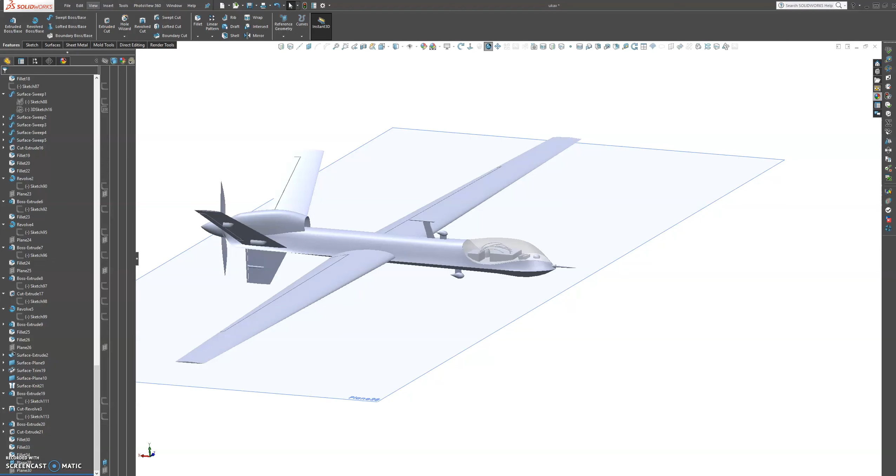I think we have to do one by one. So let's go back to SolidWorks, and then we're going to use this plane. It's right underneath the body which we need, so we're going to draw on this plane.

Let's flip over so we can see things. So the first sketch that we're going to do is going to be a spline. Okay, and then first we're going to create the one that we're going to project onto the body itself.

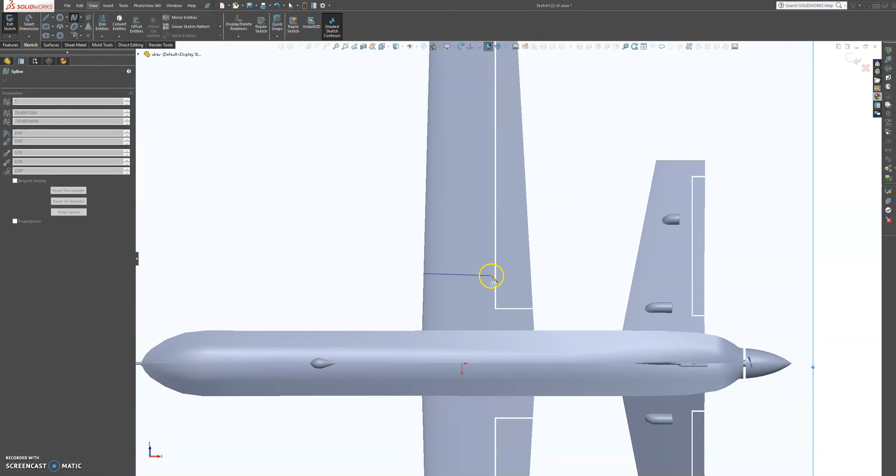So the first one will be somewhere about here, and exit this one, and let's come in here and manipulate the sketch, just somewhere out here, like that.

Also, we don't want to make it too thick, so let's create quickly a center line so we can mirror this entity over, and create our mirror. Let's make sure that our points are connecting to each other, so our mirror will be good, and our shaded sketch. So let's create a mirror, and mirror this entity over this line.

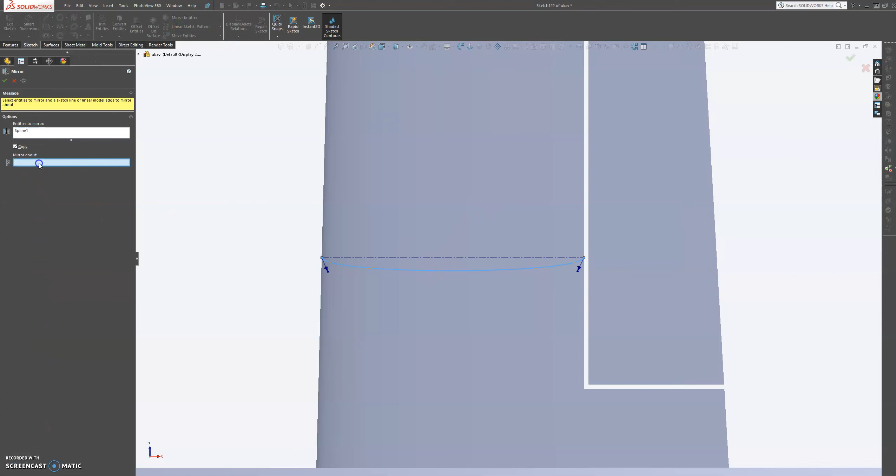Now if we move one entity, then the other one will move with it, so we can see exactly what we're looking for and what we want. So let's not make this too thick, something like that, and back here as well.

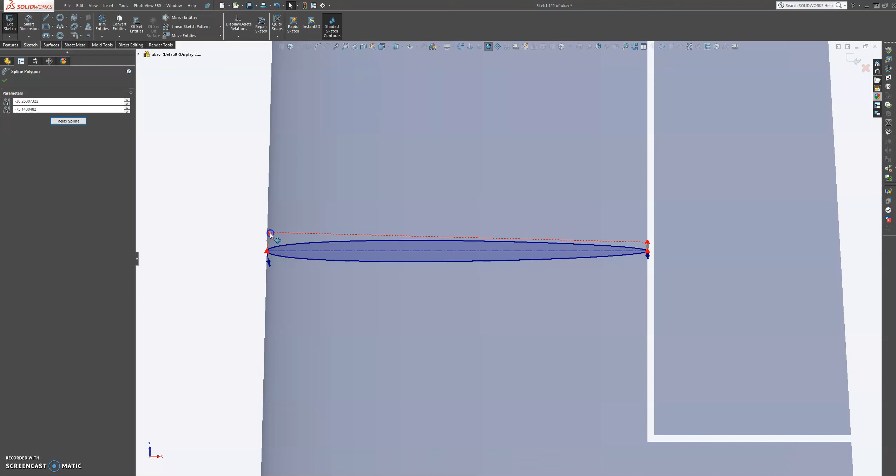Okay, for the top portion it's going to be perfect, a little bit thinner, like that. Okay. And then we're going to press escape.

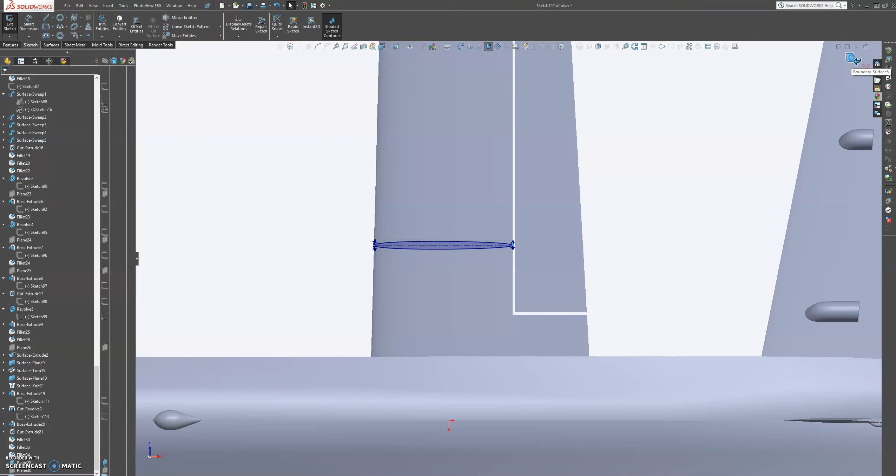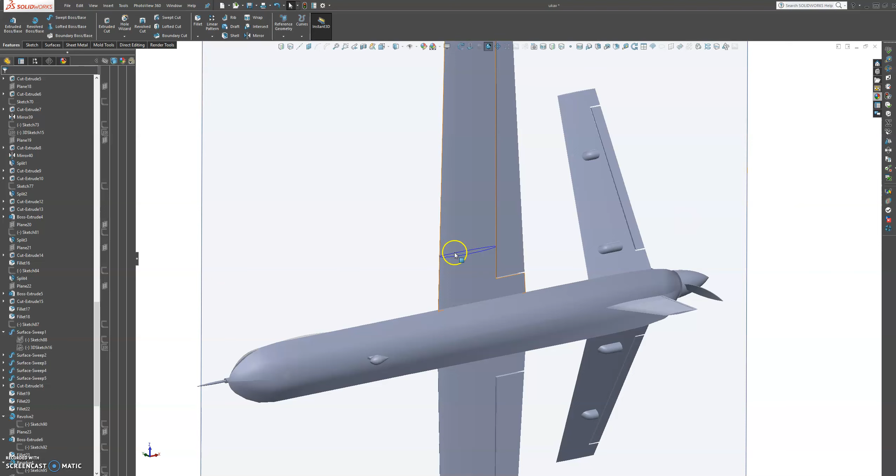Okay, and we're going to project this line, project this curve onto the plane. So let's select the sketch, and then with the face, and that's very good. Okay, that's good. And then now we have to make another sketch on this plane here.

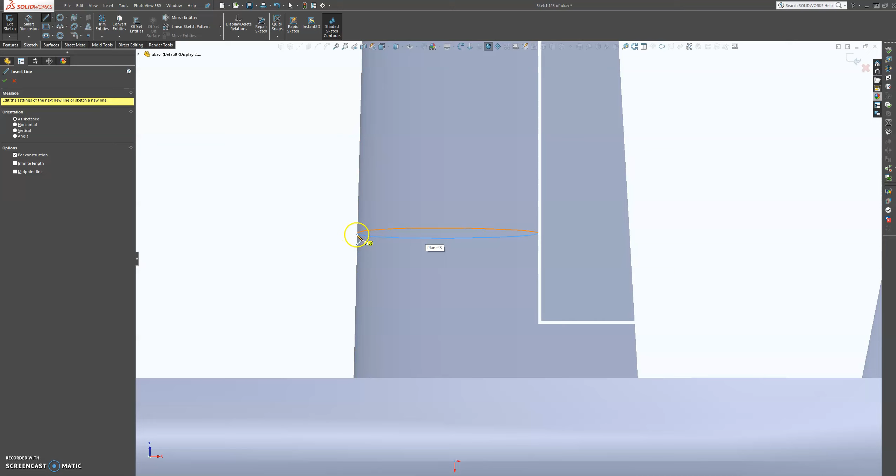Let's flip it over, and then for the bottom portion let's create a center line based off of this center line here, if you can grab that point. Okay, so that's good. And then now we're gonna grab our spline, and it's going to stick out about that much, and we're going to trim it back.

No, it's already going to be trimmed back because it's going to be a lofted surface. So let's create our spline from here all the way up to about here, so we can put the rockets on there.

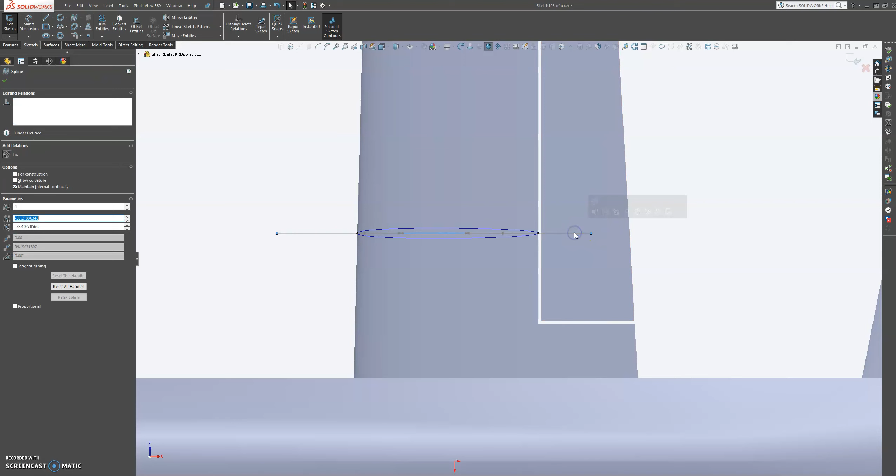Okay, exit that, and let's grab that spline and pull it out to our liking. It's not gonna be much thicker than the one that is already projected to the body, so we want to watch out for that.

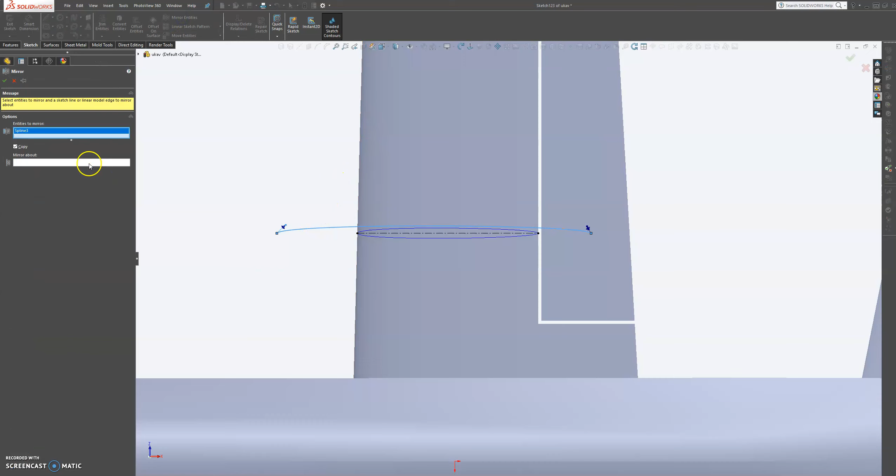Okay, so let's create a center line here again. Actually, we can use that center line to mirror it over, so let's mirror this over this. Okay, so now if we grab this, we can further make adjustments to it.

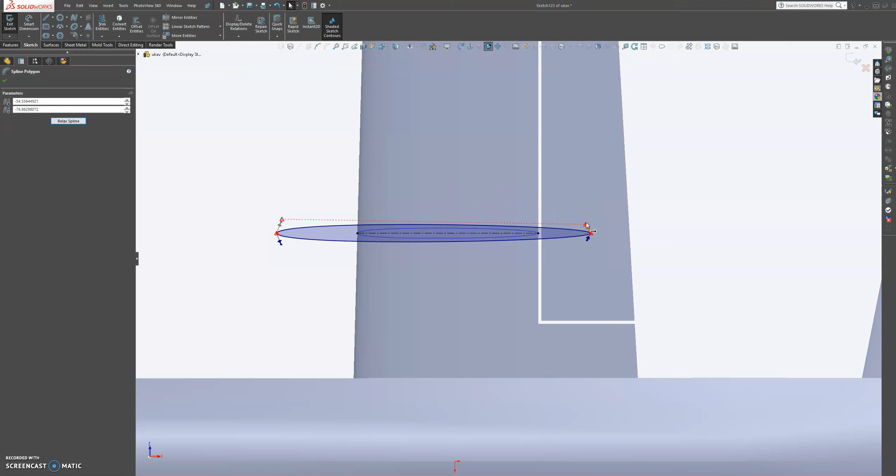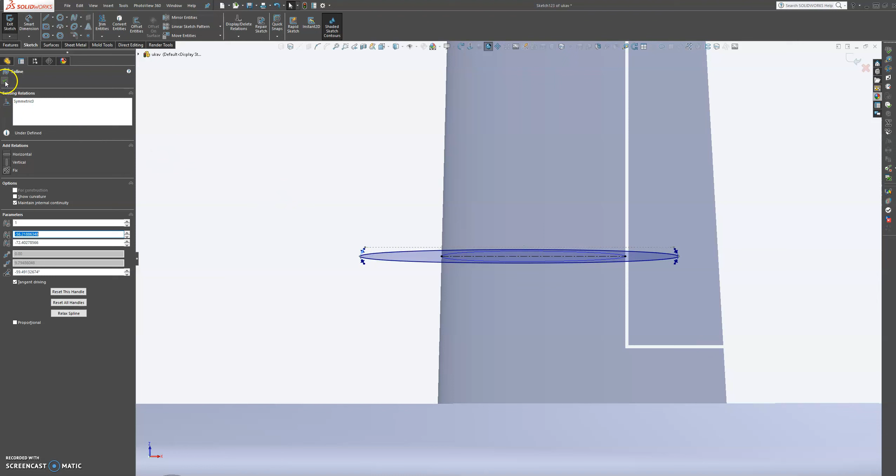Yeah, so let's try to grab our control bars here, just make it a little bit thicker in the ends, pull it in a little bit more. I don't want to make it too thick. Something about there, so I'm going to press OK on that.

Okay, so once we have these two defined, it's gonna come out something like that. To me, I think it's gonna come out a bit too far. So let's have a look. It doesn't come out that far.

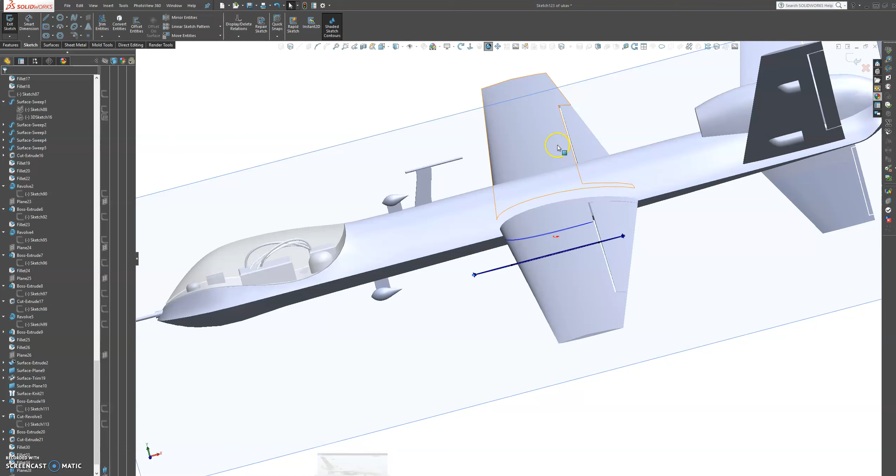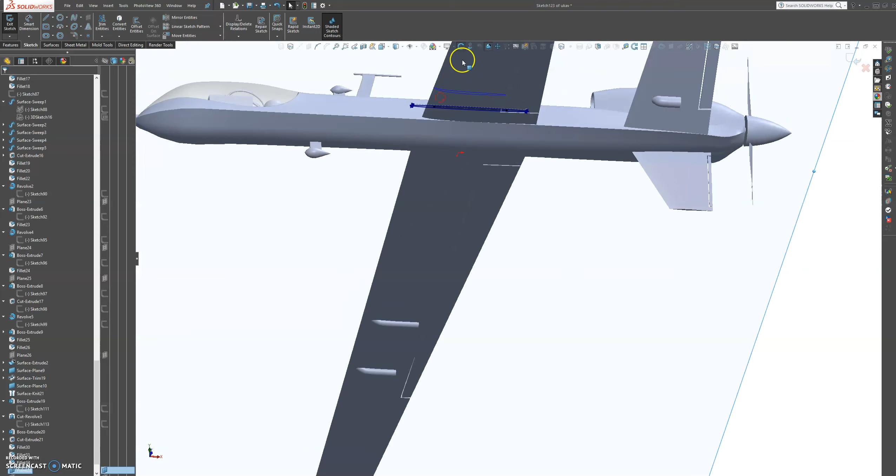So let's head back to the sketch and make some adjustments to it. Let's grab that point here, just pull it back about that much, and that's gonna be perfect. So let's have a look, and it's gonna come out like that to that point. Let's have a look at the sketch again.

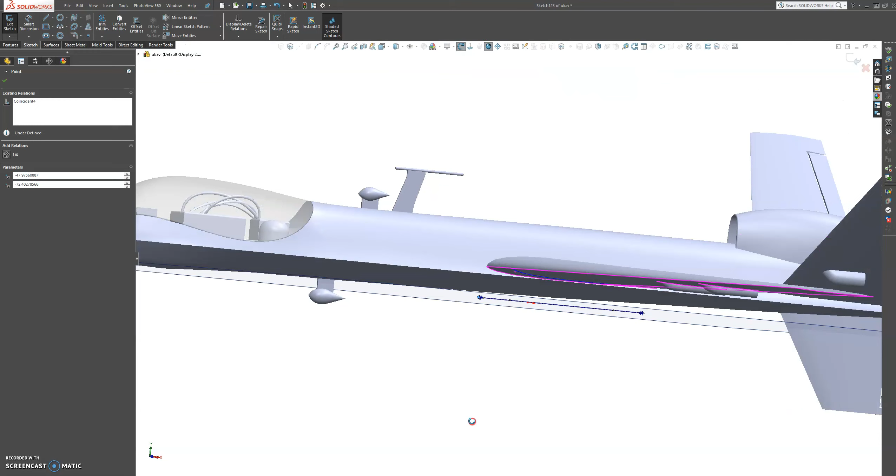Let's have a look. I touched something here that we shouldn't have. So let's come back with our spline. It comes out like about that much, but that way. Okay, that's good.

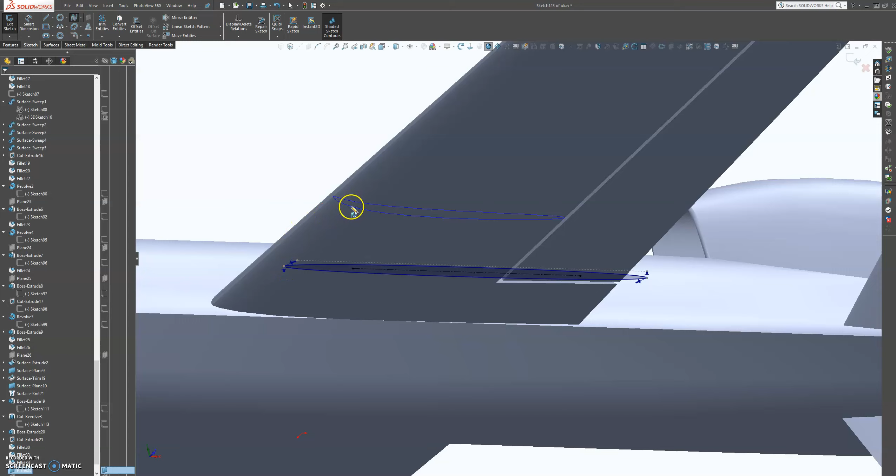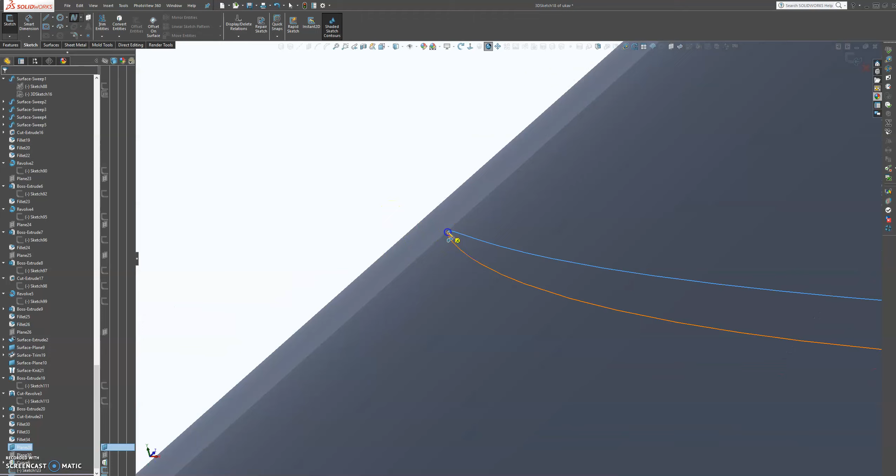Okay, let's exit this sketch and now go to 3D sketch, and let's see if this time we'll be able to snap onto it. Yes, we do. So let's snap onto this corner here and then this here.

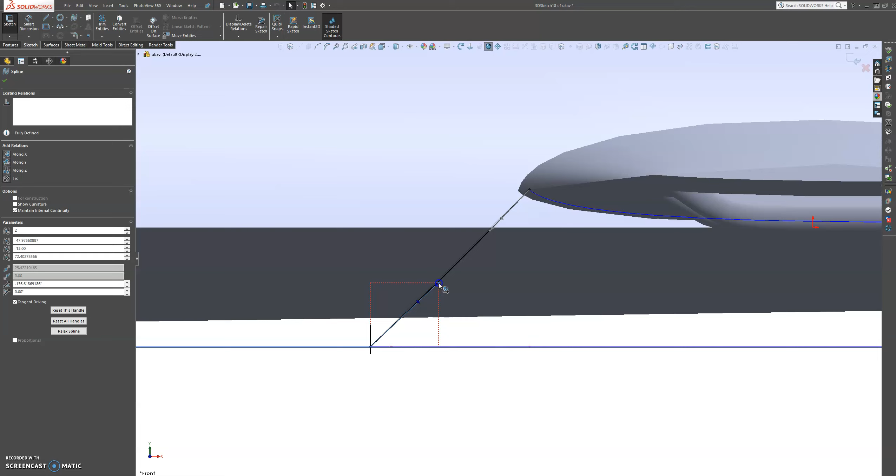Okay, and then maybe we can add a little bit of profile to that. Let's go in here and we can pull it up or pull it down a little bit. I'm gonna make it in a little bit of this direction. That's fine. I'm gonna press OK on that, and let's have a look at the rear one.

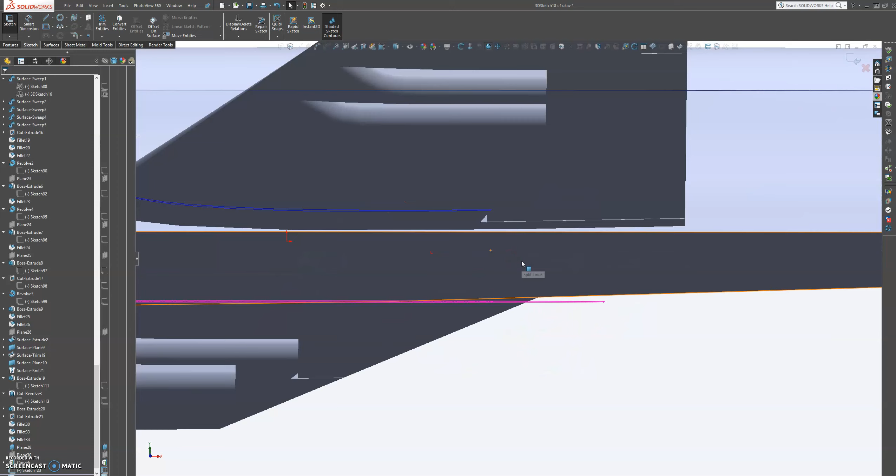Okay, so the rear one comes out about like that. So we need to grab another spline here, and let's try to snap onto this corner right in the edge. Okay, on the edge.

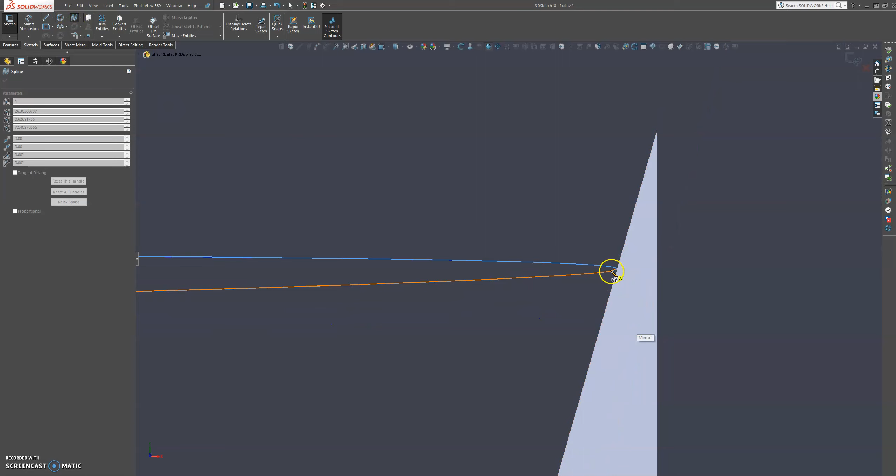Let's grab the spline again, and let's try to snap onto this corner and then this corner. Okay, and let's just grab in here and make sure that we are completely on target, and we are, because our relationships are showing. So let's OK on that.

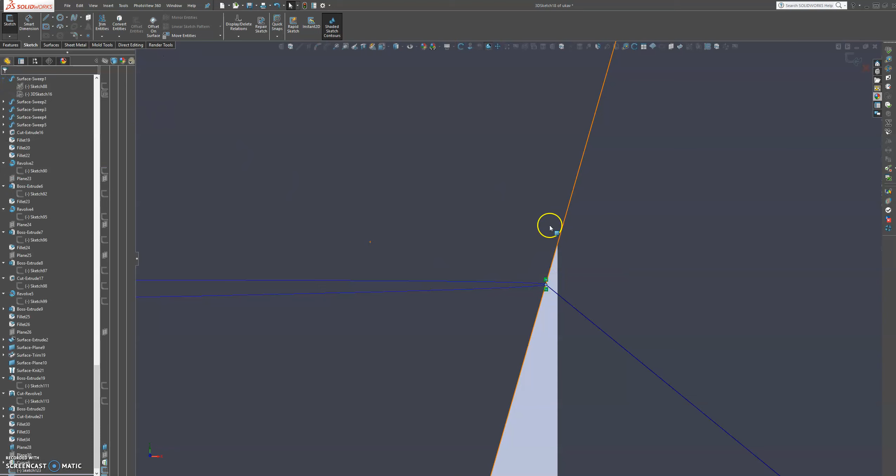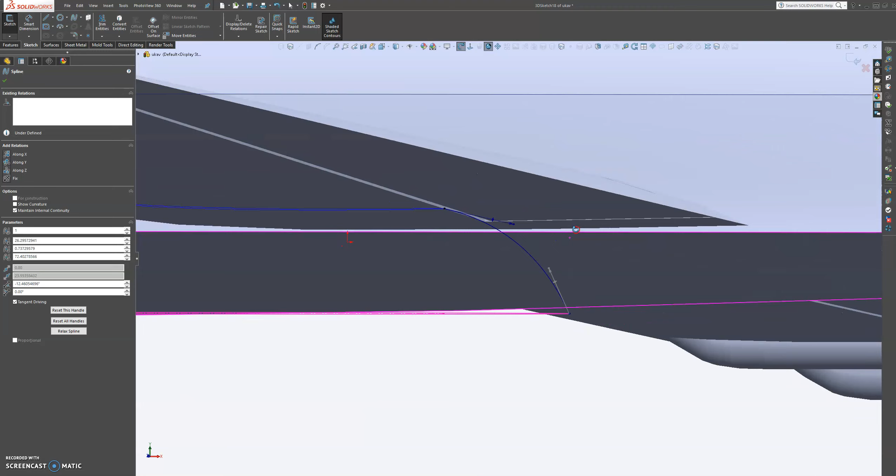Let's just press spacebar on your keyboard, and that will bring you into this view, and we can create our shape. So our shape is going out in this direction, so our flaps can still come down and do its business, and that is perfect. Okay, so I'm going to press OK on that, but first let's have a look at our image. We're fairly close if you bring this in a little bit. So let's press OK on that.

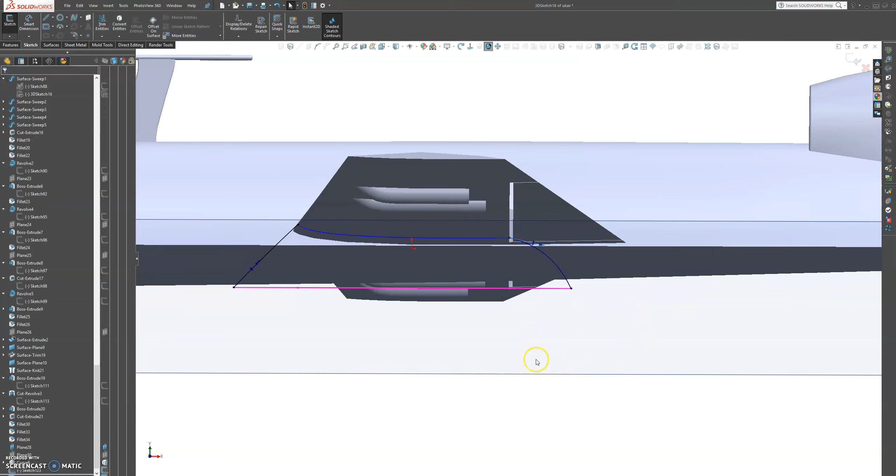Let's have a look at what we got. Okay, so now let's go to our features, and let's do a loft boss base and see if we can grab our sketches. Unfortunately not in this way. So let's see what else can we do.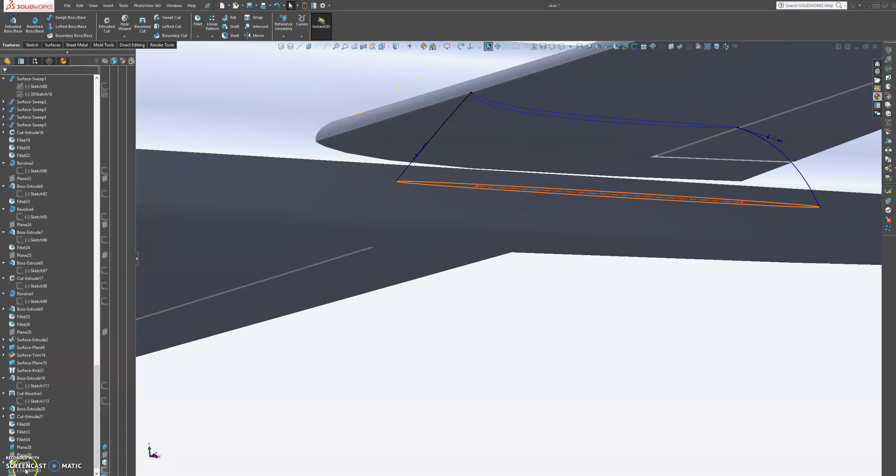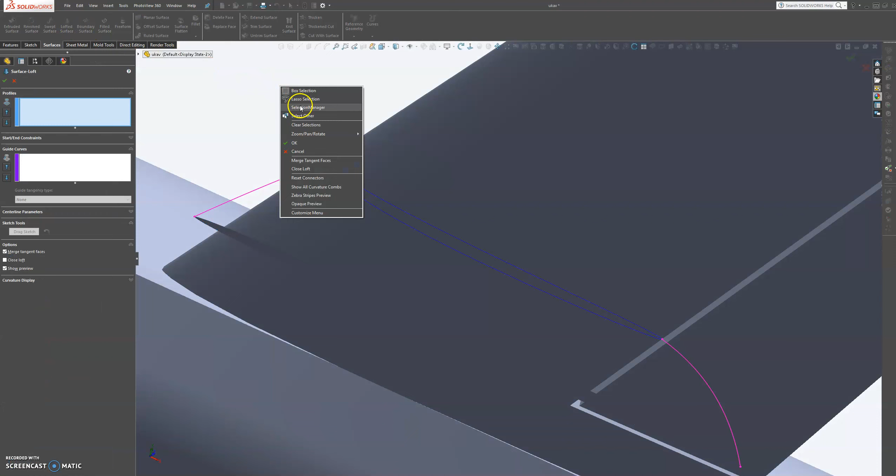Okay, so there's one more thing we can try is we're going to create 3D sketches on this part here, and come back. So what we can do is go back to surfaces, and we need to create our loft from this sketch. So then we will be able to bring this up. Select OK on that, and now we can go back to loft and go to selection manager, select this edge and then this edge, and press OK. And now we can select that sketch, and now that gives us our shape.

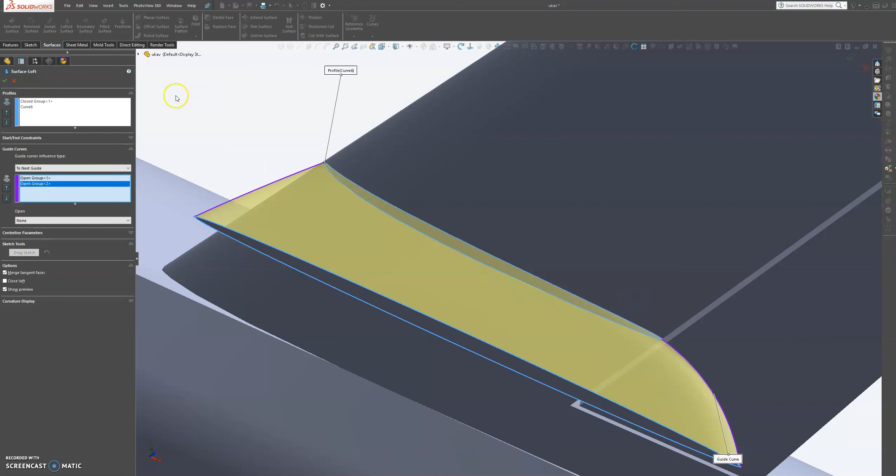So for guide curves, let's choose the guide curve number 1 for this. Press OK. And guide curve number 2 on this. Press OK. And let's select check on that. And that's good. Now let's have a look at this body, if it's a solid body.

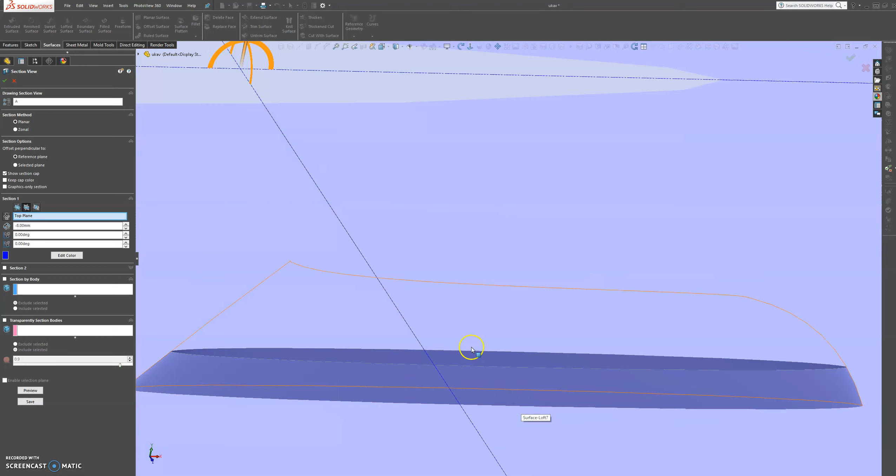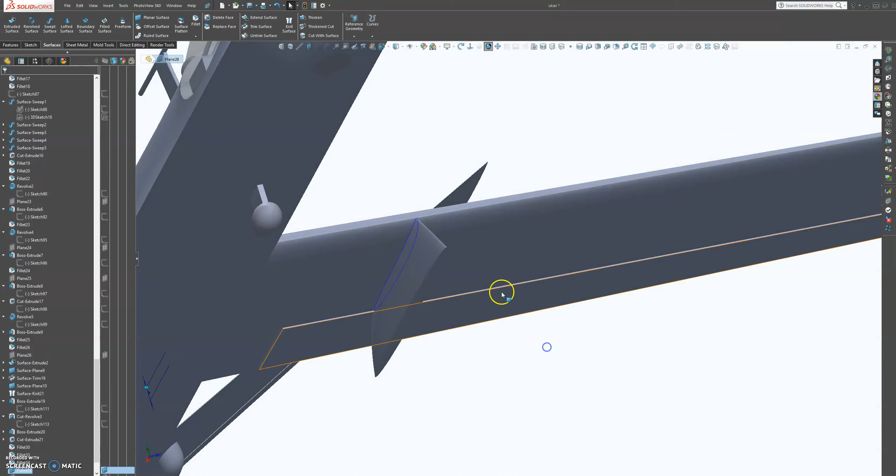It's actually created a surface for us. Let's see if we can make it into a solid body. So let's choose this face with this one. So we're going to keep this as a surface, and later on we will try to create it into a solid.

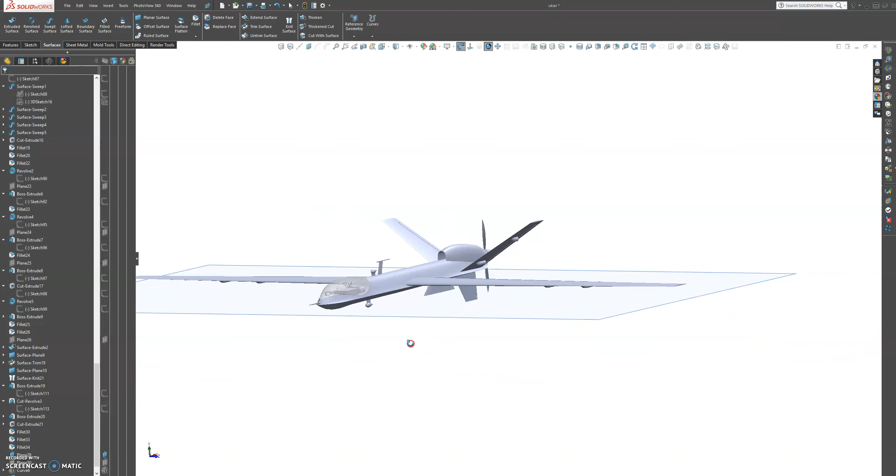Okay, so we got our first rocket mount, and then I'm going to do the same process on all 3 of them that is left to do, and I'll come back to you once it's done in the next tutorial. Okay, bye.